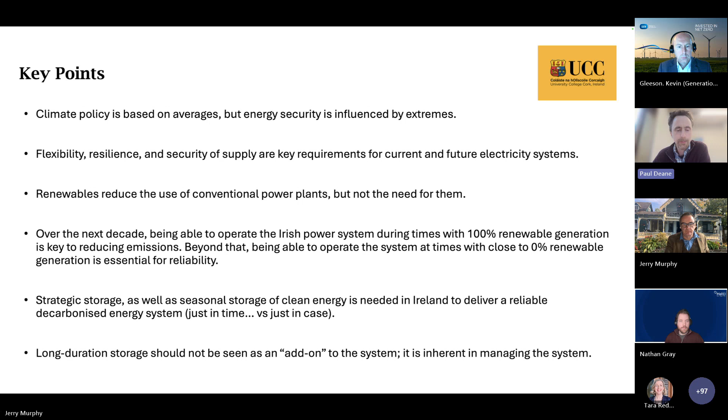And when we think about the future, part of the work that we do down in UCC, although we like to express it as complex, detailed, and difficult work, actually, if you're thinking about moving away from fossil fuels and you don't have things like commercially available nuclear and other options, you really have to lean into your renewables.

But there's a problem here. Electricity is great. We can do lots of wonderful things with electricity, but today about 80% of our energy system doesn't have plugs on it. It doesn't use electricity. So we need to put plugs on more things. And as Jerry and Nathan will chat to later on, you can't put a plug on everything. So we have to think about the elements that are hard to abate, things that are hard to convert to electricity, like ships and planes and ferries and all these things. And that's important too. And if I just have my last slide, please, Jerry.

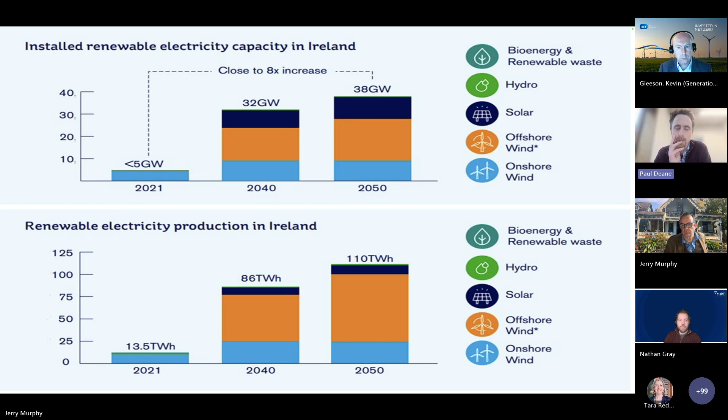And people often say to me, well, Paul, why are we thinking about this now? Why don't we wait till 2040 or 2030 and think about it then? It roughly takes about 20 years to get things done in modern Western democracies like Ireland. If you look at how long it takes to get storage, if you look at the strategic gas storage that we're thinking about at the moment, we started thinking about that almost 6 or 7 years ago, and it's still a good bit away from delivery yet.

So things take time. And when we move away from a hydrocarbon system, particularly natural gas, you're moving away from the geopolitical risks, but you're trading those geopolitical risks for meteorological risks, because the wind won't always blow in the same way the gas won't always flow. And that's why we're investing in strategic gas storage in Ireland today. So when we think about the future, it's important to think about what role will hydrogen play in some form of long duration, seasonal or strategic energy storage.

And for me, I think there's very few options available because current battery chemistry is limited. Current nuclear technology isn't commercially available. Maybe it will in the future, who knows? But we have to deal with the future that we know that's in front of us. So thinking about the longer term storage issue and repurposing the existing storage ideas that we have already are really, really important. Because as I said, the next couple of years for the TSO, for the regulator, is understanding how we can operate our electricity system with 100% renewables. But we mustn't forget that we'll also have to operate it during long periods where there will be low levels of renewables, and we need to start preparing for that now.

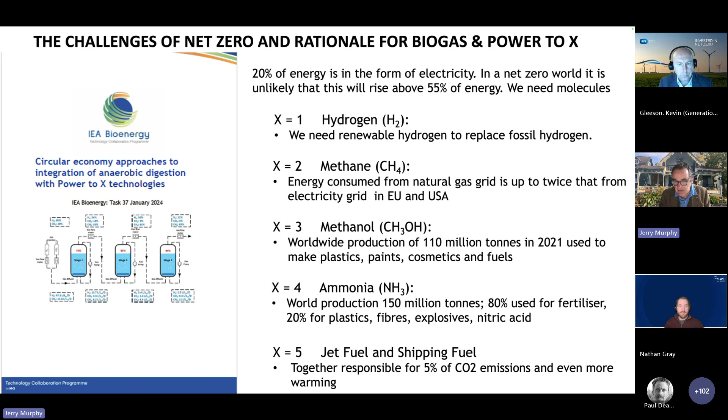We need molecules. So this is a menu that we use in our research group when we try to connect everything in what we would call circular economy, energy and environmental systems. So we're trying to have this cascading, interconnected type system.

And so when we look at offshore wind, the ORESS, and I noted yesterday that the North Sea partners agreed that they would have a target of 100 gigawatts of offshore wind in the North Sea by 2030. Ireland is one of those signatories. So it's very, very ambitious and very, very expansive.

And if we look at Ireland here, we have all these areas where we may be having wind farms starting on the east coast feeding electricity and then moving south and eventually moving west into floating offshore wind. And we can see over on the right here, phase one is about, I think, about 3 gigawatts. We've now moved down to phase two, Tonn Nua, which is 0.9 of a gigawatt, but we will have more of these auctioned.

And there was an auction pipeline to be auctioned by 2030 of 17 gigawatts of offshore wind. And that's for a country that has rarely used more than 7.5 gigawatts. And we do have challenges in the electricity grid in that this system non-synchronous penetration, in essence, is the ratio of renewable electricity in Ireland to the system demand. And we have one of the highest levels of this on a worldwide basis because we are an island nation.

So we do have challenges in having all of this renewable onshore wind, offshore wind, PV in an islanded system. What I find interesting is phase three. It's in the climate action plan as 2 gigawatts of hydrogen. It was in the pipeline as private wire, but there is an expectation that a gigawatt will come into Cork.

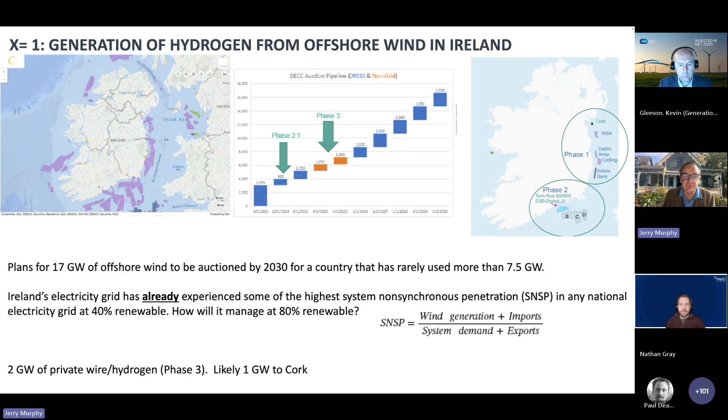So what do we do in Cork? Do we have data centres? Do we produce hydrogen? Do we produce ammonia? Do we produce methanol? So it's an interesting problem to have.

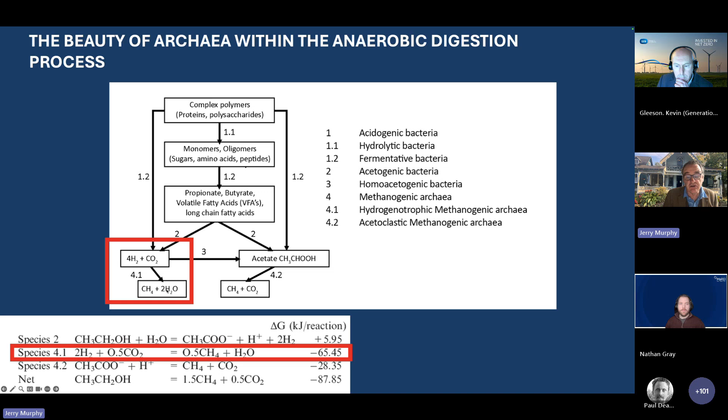And what it does, it reacts 4 moles of hydrogen with a mole of CO2 and makes methane and water. It's an exothermic reaction. The archaea want to do this. It's what they were born to do.

So we have designed this bespoke system where we add hydrogen and carbon dioxide into these 3 reactors. Hydrogen is slow to go into solution, so we get it under pressure, we recirculate, and we've run the system in our lab, and we can see, for example, that hydrogen and carbon dioxide start producing methane in reactor 1. So this envelope is the methane diagram. In R2, we get up to 80%, and in R3, we get about 95, 96% methane.

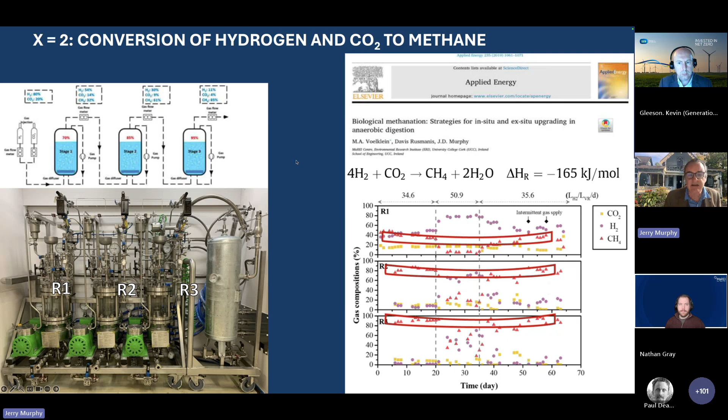And we've done this with varying the flows and intermittent, but we can make methane from hydrogen and carbon dioxide in a process. And you might ask, why would we do it? I suppose one of the reasons is we have a natural gas grid. So we could put the methane into the gas grid and use that facility. It also lends itself to bespoke applications.

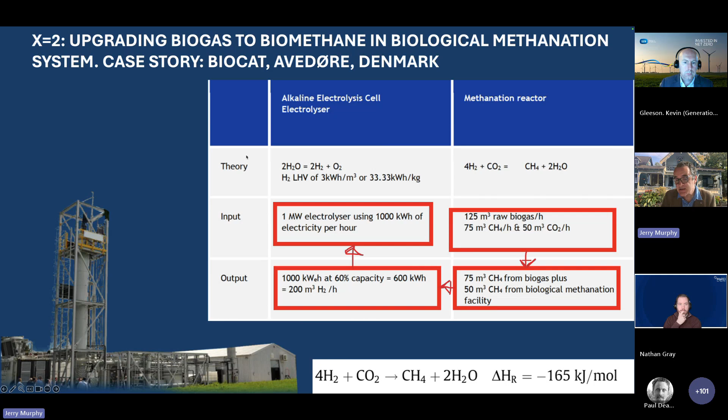What we needed was 4 times the amount of hydrogen as CO2. So that 50 meters cubed of CO2 requires 200 meters cubed of hydrogen, which is 600 kilowatt hours, because hydrogen is 3 kilowatt hours per meter cubed, which is a 1 megawatt electrolyzer. So we can put an electrolyzer at a wastewater treatment plant and convert biogas into pure methane and upgrade biogas. So these are part of our scenarios that we would look at.

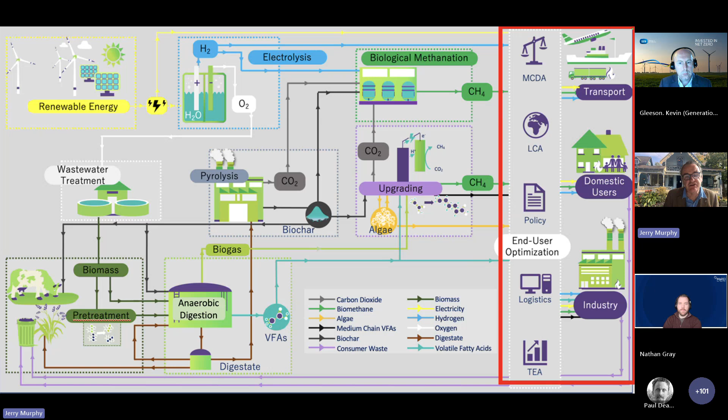We've done a lot of work in the MaREI Centre with industry, which is quite a large user of energy. So for example, we've worked with Pernod Ricard in Midleton and in Paris and in Mexico. And we've been looking at decarbonising the food and beverage sector. So for example, if we were to look at a large distillery like Midleton, I think it's the 4th largest distillery on the planet, and you want to have a net zero alcohol, there are many ways to do it. You electrify as much as you can, but we found we couldn't get beyond 67% decarbonisation without biogas.

So you take the byproducts of the distillery and you anaerobically digest them and you replace natural gas. The distillery of itself produces 50,000 tons of biogenic CO2 from fermentation. And if you replace natural gas with biogas, then the stack is also biogenic CO2. And we could take the CO2 from that stack and react with hydrogen and make more methane if we so wish. So we see this food and beverage as a huge element of our circular economy.

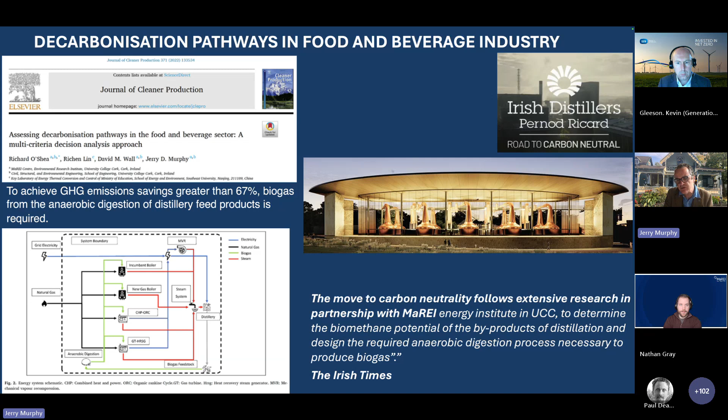So for example, if I go down the Lower Harbour in Cork, and we have this gigawatt of private wire coming ashore, I can split water and make hydrogen and oxygen. I could put that electrolyzer at the wastewater treatment plant in Carrigrennan, or I could put it at the ammonia facility in the Lower Harbour. And then we have our biogenic CO2, and the CO2 has to be renewable. So it has to come from biomethane or ethanol or alcohol, and we react the CO2 with the hydrogen and we make methanol. So we're making renewable hydrocarbons.

And methanol is a liquid, which is a huge advantage. So we could have tanks of methanol across the country to be used as a dispatchable source of renewable electricity in the form of a molecule. So we've converted electricity to hydrogen and onto a liquid fuel. The biogenic CO2 is really, really important, because if we look at direct air carbon capture, it's about 450 euros a tonne. It's very, very expensive. However, CO2 from a distillery or from biomethane is about 20 euros a tonne.

So the cheapest form of biomethanol or renewable hydrocarbons will come when associated with a distillery, with a creamery, with an ethanol plant, or with a biomethane plant. And it's important to know we have a target of 10% substitution of natural gas with biomethane. So we're going to be producing a lot of biomethane for the gas grid, but the CO2 can be used to make renewable hydrocarbons.

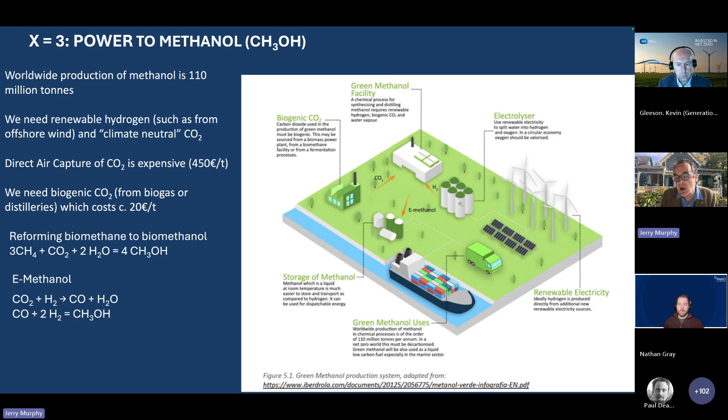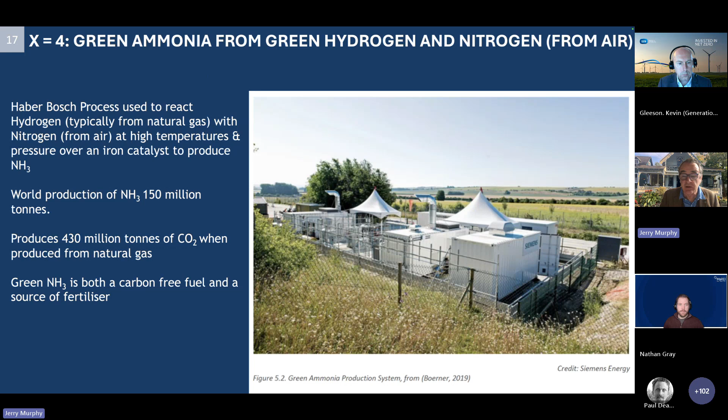We can also make ammonia. And again, we could go to the Lower Harbour, put an electrolyzer at the existing facility and make renewable fertilizer, renewable ammonia, and all the uses that would be available for that.

So this is very, very exciting, and it brings together the idea that we need renewable fuels. The largest resource of renewable fuels will come from electricity. We're looking at 100 gigawatts of electricity in the North Sea, and we can make fuels that will provide the storage of dispatchable energy that Paul talked about.

So I might pass you over now to Nathan Gray. Dr. Nathan Gray is the primary author on this report that looks at the work of ESB and MaREI in looking at a business case for hydrogen. Nathan, are you happy to take over? Yes, thanks very much, Jerry. If you could just go to the next slide. That would be great. Yeah, so thank you, Jerry and Paul and Kevin.

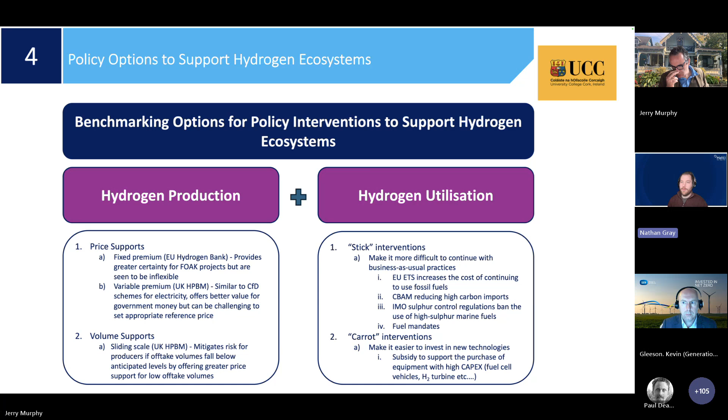And then again, just to reiterate, when considering support for hydrogen projects, I think it's very important to bear in mind the priority of hydrogen end uses as set out in the National Hydrogen Strategy, and a potential way to incorporate this would be defining a list of qualifying sectors eligible for support as a way of directing hydrogen use to where it is most needed, and discouraging it from where it's not seen as a priority.

Next slide, please, Jerry.

So as Jerry covered at the end of his presentation, to kickstart a hydrogen ecosystem in Ireland, the National Hydrogen Strategy suggests initially starting out with a cluster-based approach to hydrogen, where production, storage, and high priority demand are all co-located. Fortuitously, the Cork area has all three elements of this cluster-based approach, with significant offshore wind potential, large-scale storage available in the depleted Kinsale Head gas field, and potential baseload end users for hydrogen, as seen in the Whitegate refinery in the Lower Harbour, or the two power stations down there as well.

And therefore, we would see Cork as being well situated to being Ireland's first hydrogen cluster, where the support options or business models for supporting a hydrogen industry could potentially be tested and refined before being rolled out to other sites across the country.

Next slide, please, Jerry.

Just to conclude then, with a broad overview of the steps taken to support the development of a hydrogen ecosystem in Ireland, and the path to maturity. In terms of the near-term goals, the emphasis should probably be on supporting domestic production and supply, scaling up storage for system resilience, and encouraging fuel switching within existing industries to help mitigate price and volume risks for early projects. Once the industry has been established, the next step would probably involve encouraging new industries to relocate to Ireland or set up here to help stimulate further demand and growth in the sector.

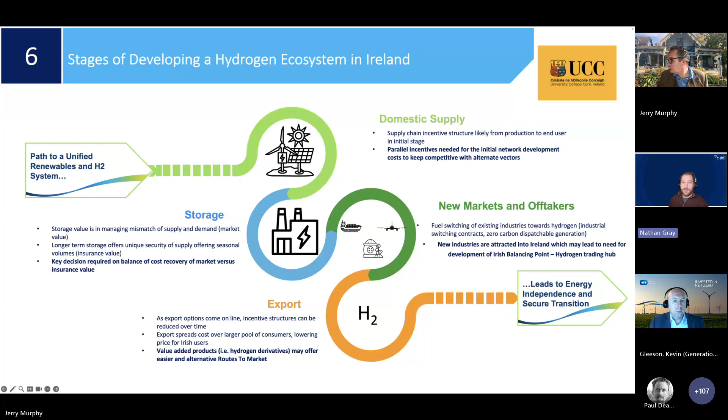And then, as an end stage, once domestic demand has been satisfied, there may be potential to explore the market for exports, particularly in the form of higher value-added products such as methanol or ammonia, as this would help spread the costs over a larger pool of customers and potentially help lower prices for Irish users. Next slide, please, Jerry.